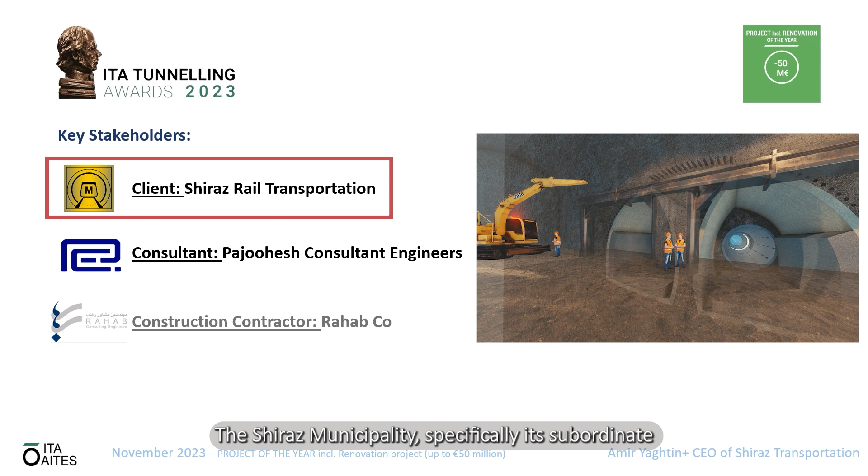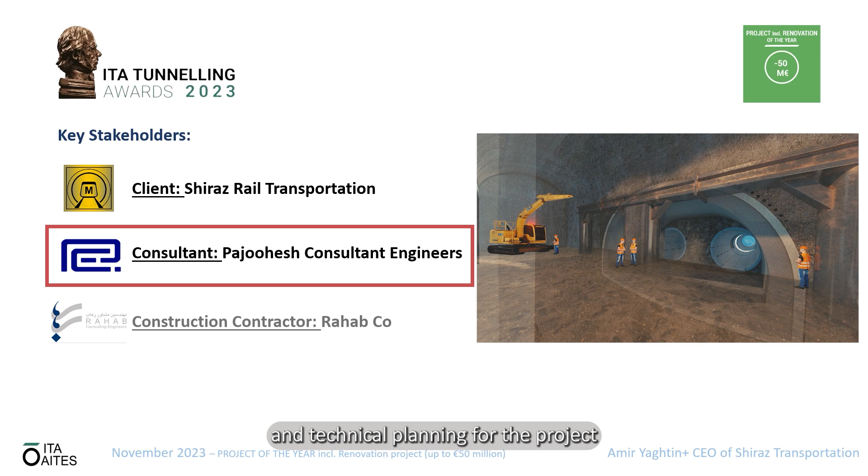In this section, we'll introduce the key stakeholders of our project, each playing a crucial role in its success. Client: the Shiraz municipality, specifically its subordinate, the Shiraz Rail Transportation Organization, is responsible for funding and commissioning the project after construction. Consultant: Pajoohesh consultant engineers provide design oversight and technical planning for the project. Construction contractor: Rahab Company specializes in infrastructure projects, handling excavation and construction tasks.

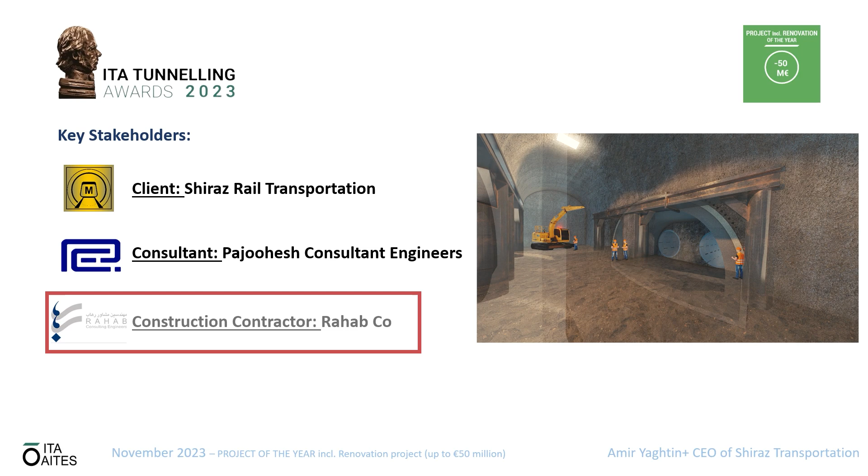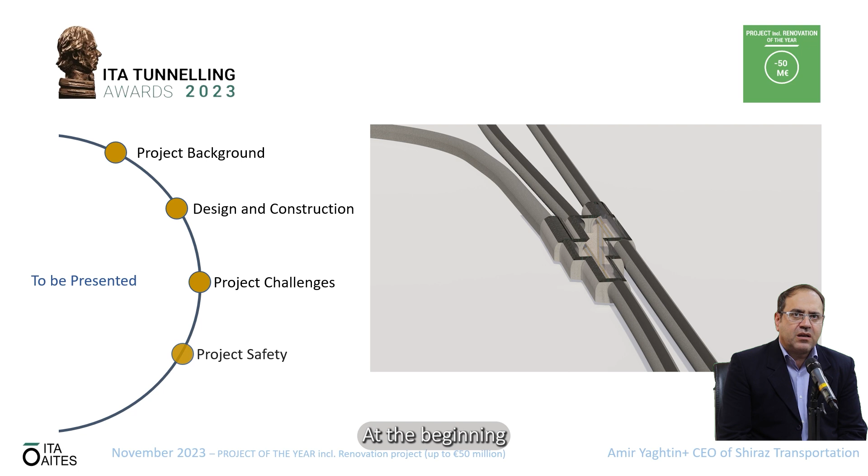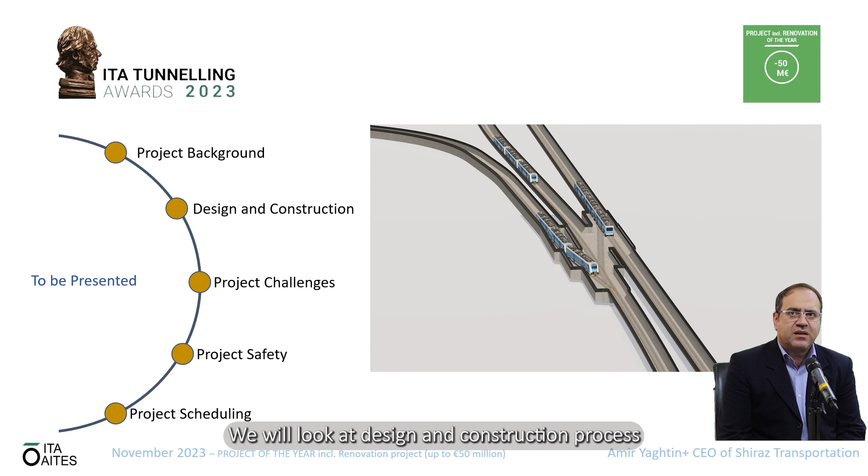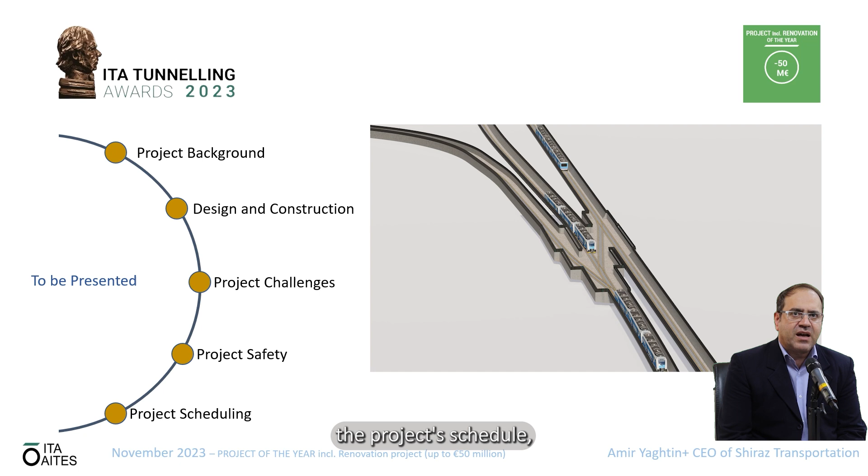In this presentation, we will talk about the following topics. At the beginning, we will take a look at the project's history and the reasons for its construction. Following that, we will look at the design and construction process as well as the challenges we encountered along the way. Finally, we will address the project's schedule, budget, and safety status.

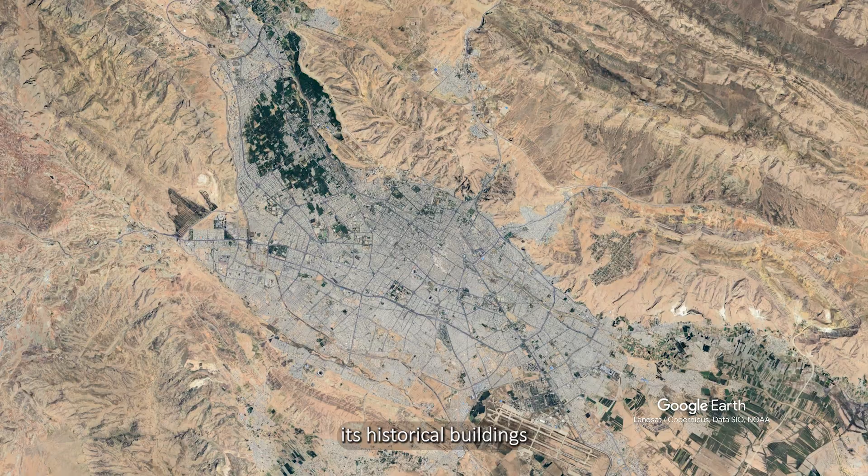Shiraz, the city where our project is located, is a place steeped in history and culture. It's in the southwest of Iran and is known for its historical buildings that reflect its ancient past. Shiraz is also famous for being the hometown of Iranian poets like Hafez and Sadi. Today, it's a lively city with a diverse and hospitable population of around 2 million, making it the fourth largest city in Iran.

To address the problem of traffic congestion in Shiraz and help improve the air quality, especially during the colder months of the year, the development of metro lines has been part of the city's plans for the past 10 years.

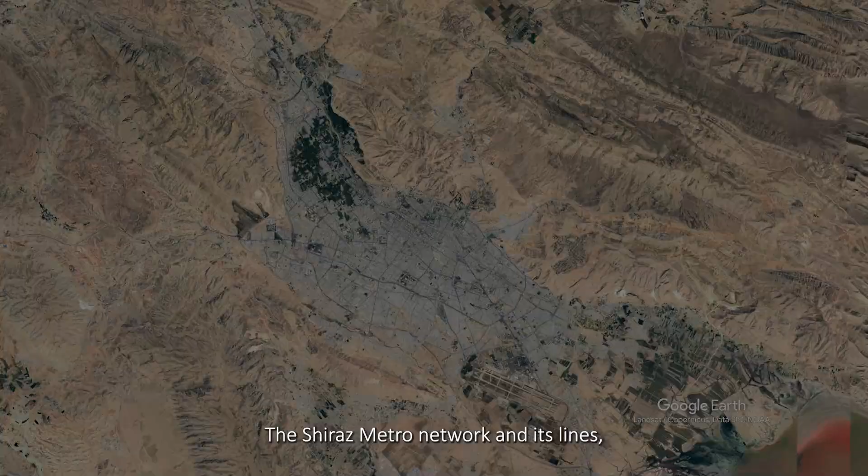The Shiraz metro network and its lines, after those in the capital city Tehran, are the second largest metro system in the country. Once completed, it's expected to support over 200 million trips annually.

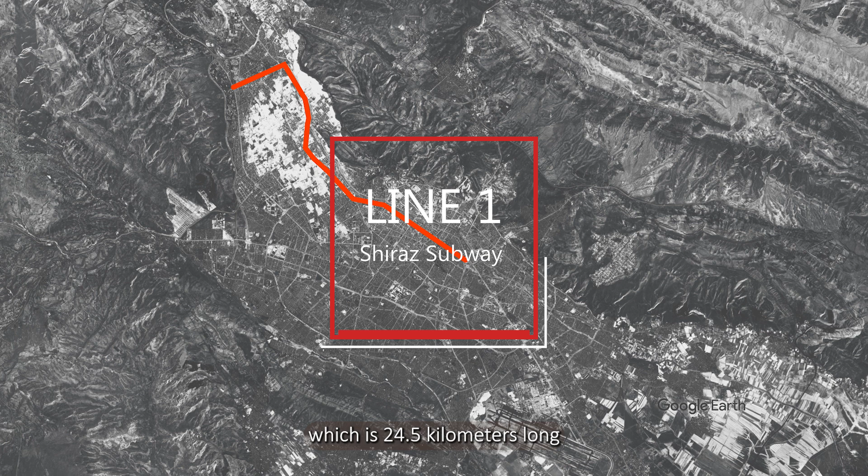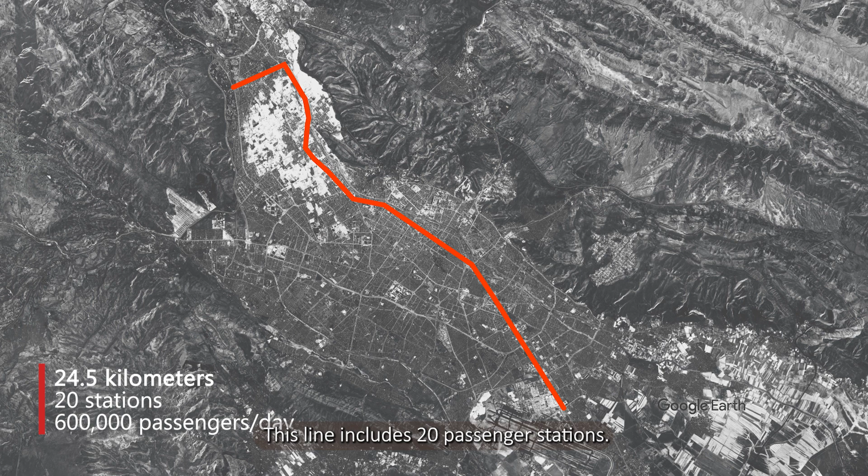The first line of the Shiraz Metro, which is 24.5 kilometers long, connects the eastern and western areas of the city, serving as a vital link within Shiraz. This line includes 20 passenger stations. During peak hours, Shiraz Metro's Line 1 transports 600,000 passengers daily.

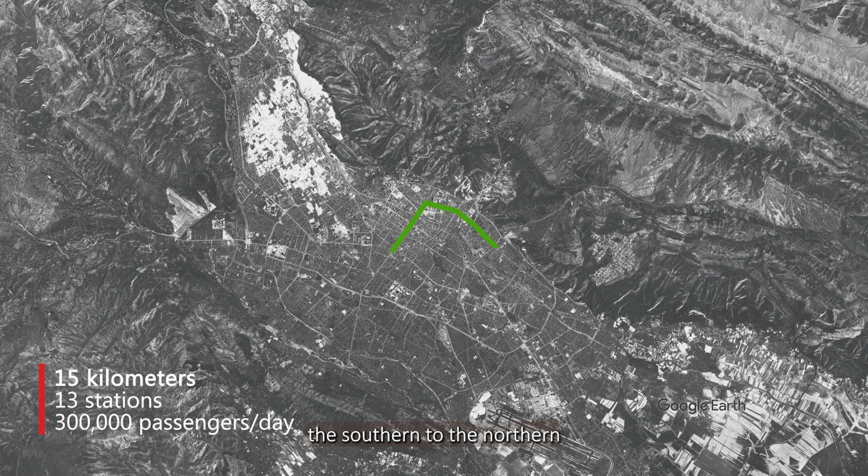The second line of the Shiraz Metro is approximately 15 kilometers long, with 13 passenger stations, extending from the southern to the northern parts of the city, providing service to important historical and cultural landmarks such as Hafez Tomb, Sadi Tomb, and Shiraz University of Medical Sciences. Line 2 also connects densely populated areas of the city to modern commercial hubs.

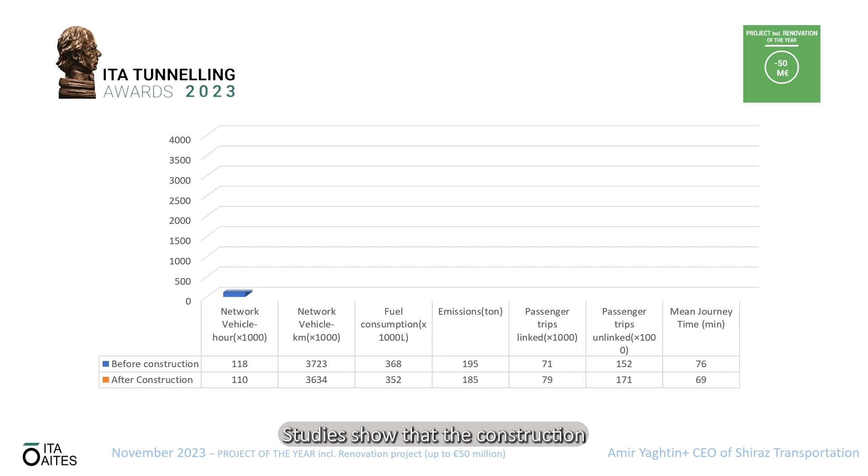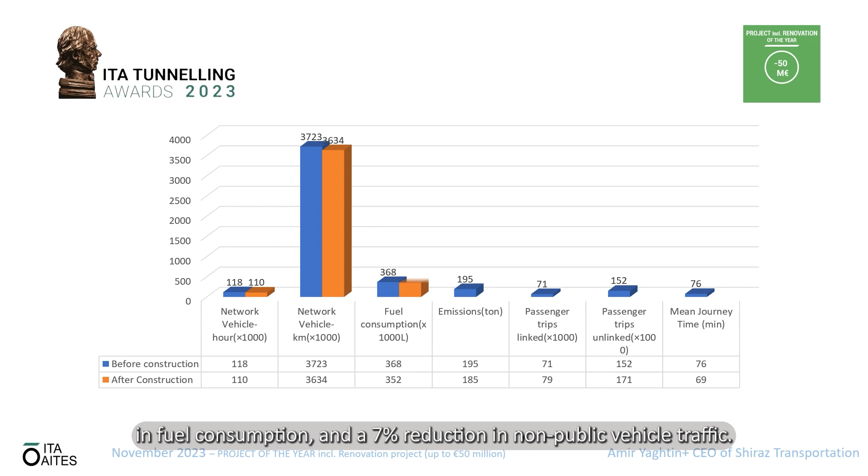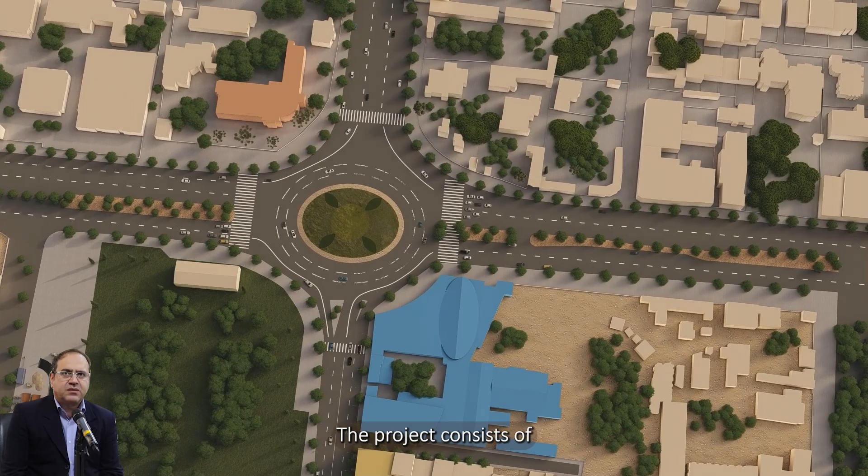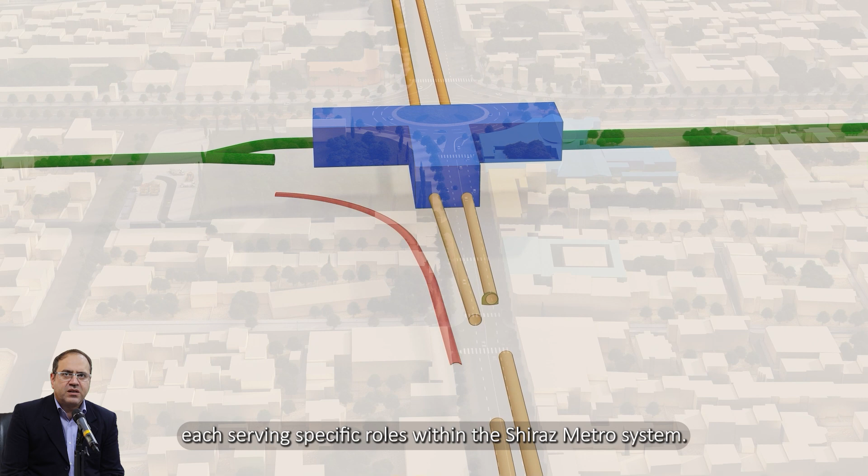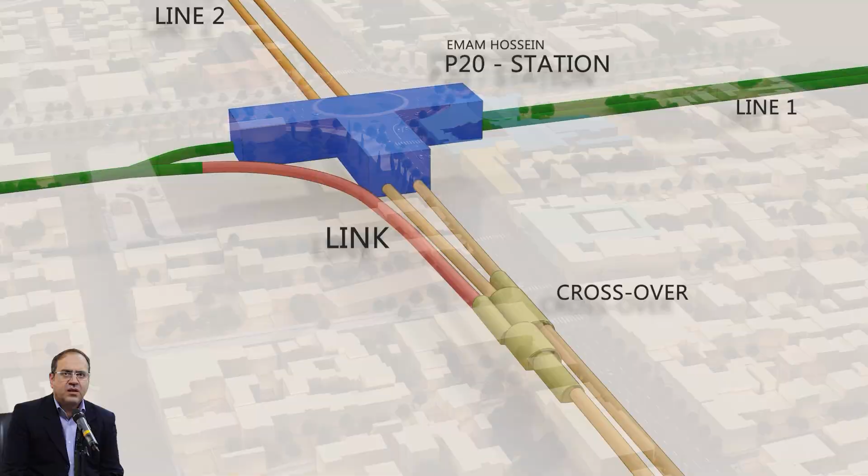The project consists of two important parts, the link tunnel and the crossover tunnel, each serving specific roles within the Shiraz metro system. The link tunnel is designed to make it easy for trains to move between Line 1 and Line 2. This tunnel is about 237 meters long, 8 meters wide, and 6 meters in height.

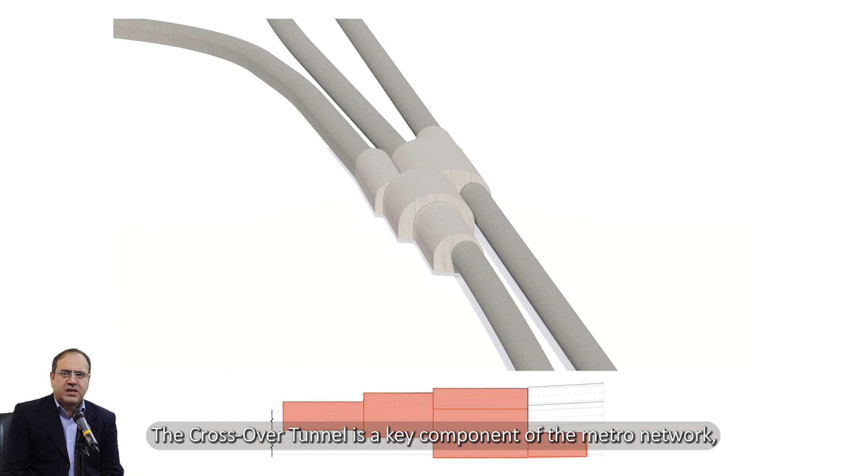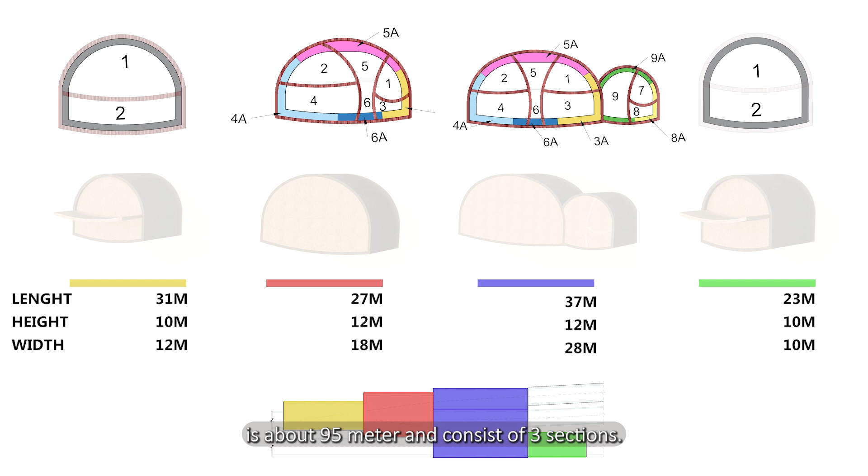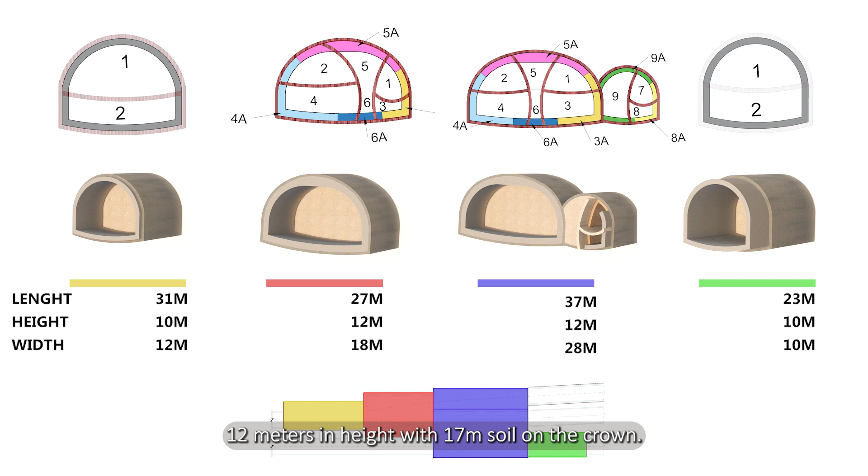The crossover tunnel is a key component of the metro network, allowing trains to switch tracks to go in the opposite direction on Line 2. The overall length of the crossover is about 95 meters and consists of 3 sections. The most critical is about 28 meters in width, 12 meters in height, with 17 meters of soil on the crown.

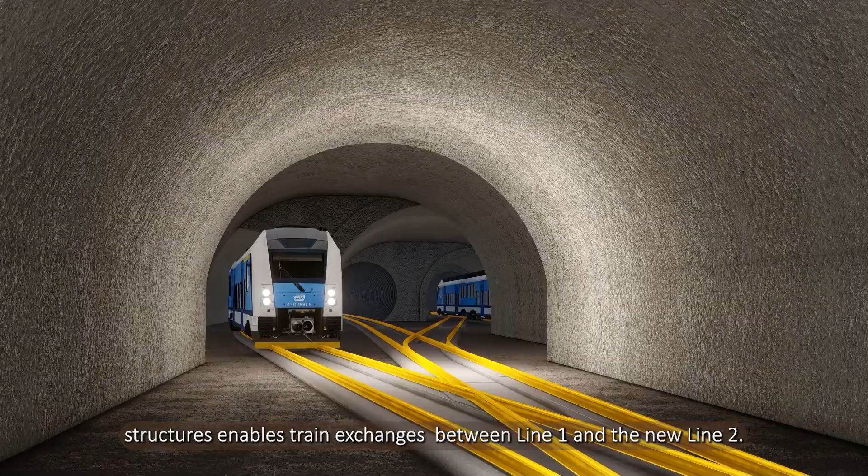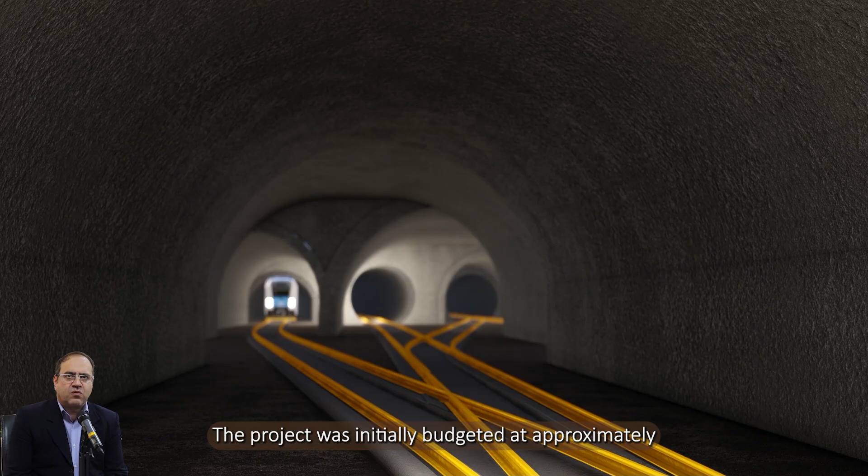Building these structures enables train exchanges between Line 1 and the new Line 2. They also support Line 2's urgent operation, given the incomplete train parking facilities. The project was initially budgeted at approximately 6.5 million euros and was estimated to be completed in 24 months.

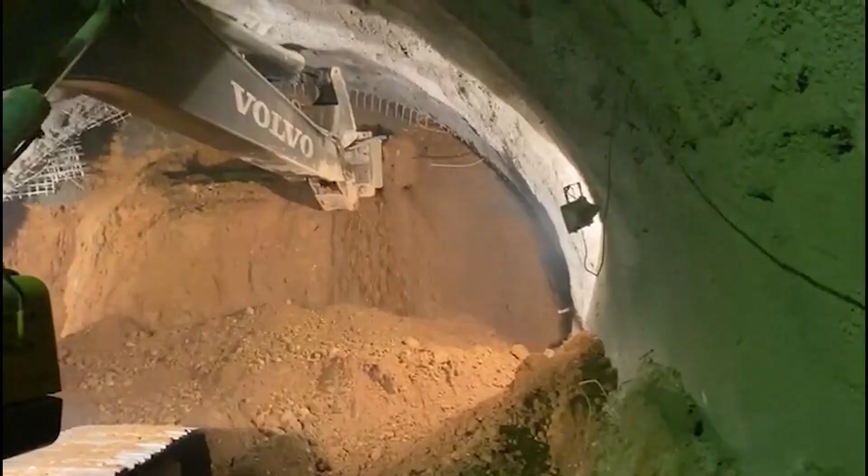The excavation volume carried out in the link tunnel was approximately 15,000 cubic meters, and in the crossover zone was about 18,000 cubic meters.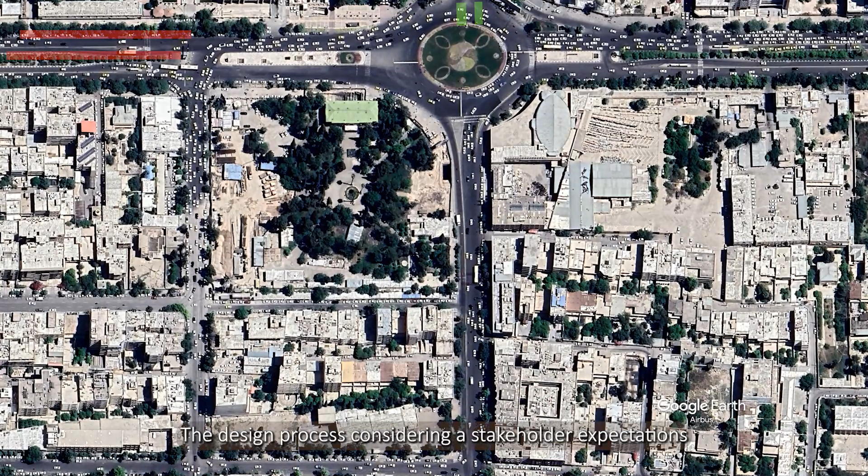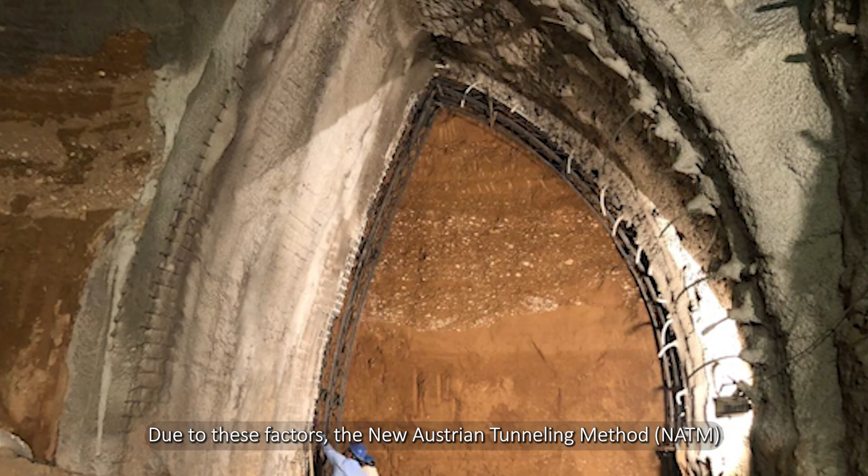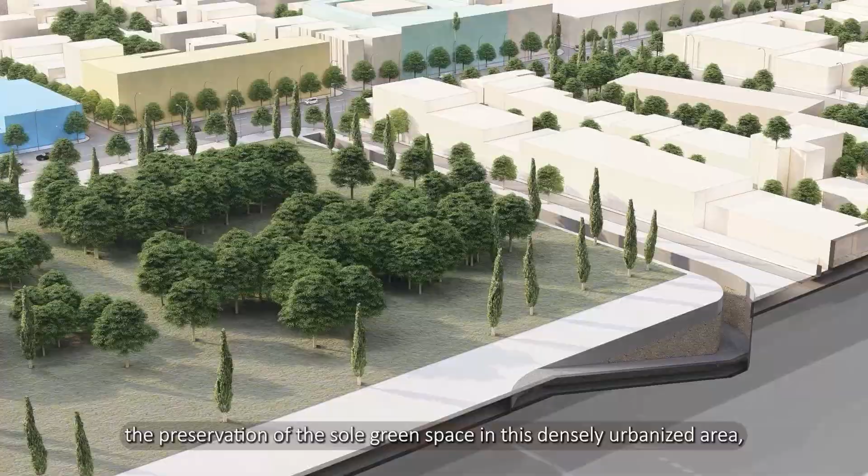The design process, considering stakeholder expectations and numerical modeling, took into account the ground traffic, the population, and building density in the project area. Due to these factors, the New Austrian Tunneling Method, NATM, was selected as the underground excavation method for this project. This method also enabled the preservation of the sole green space in this densely urbanized area, covering an area of 20,000 square meters.

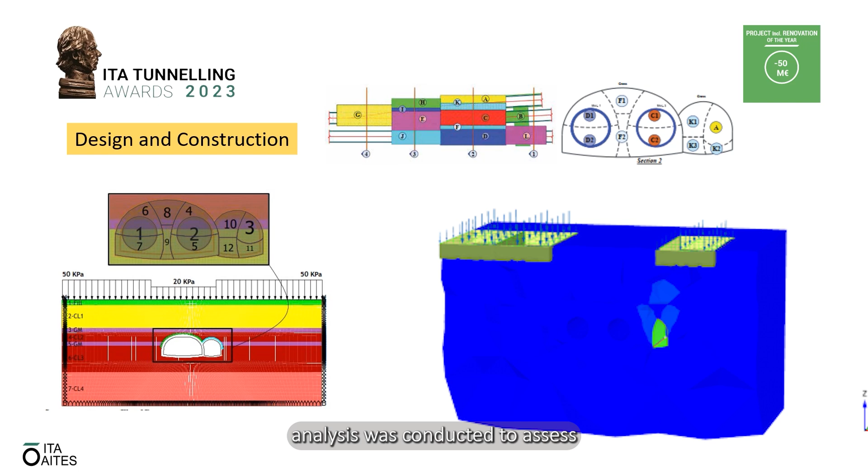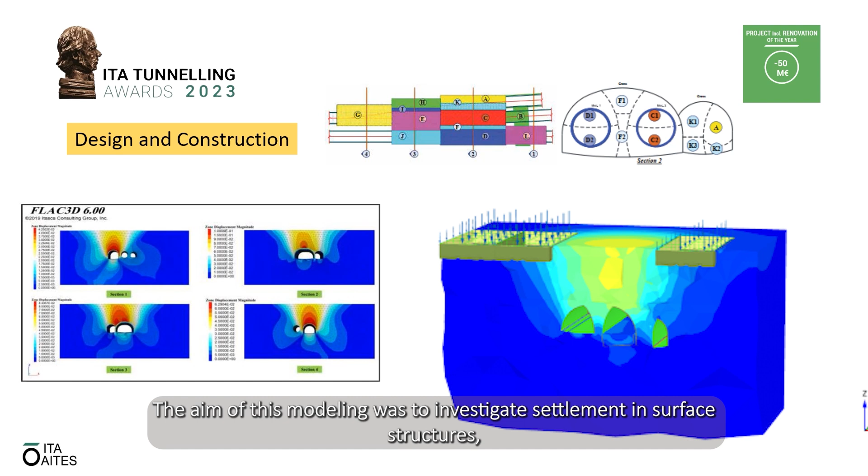2- and 3-dimensional analysis was conducted to assess the stability and design of both temporary and final structures. The aim of this modeling was to investigate settlement in surface structures, overall stability of excavation sections, and to explore possible measures for reducing settlement in subsequent stages.

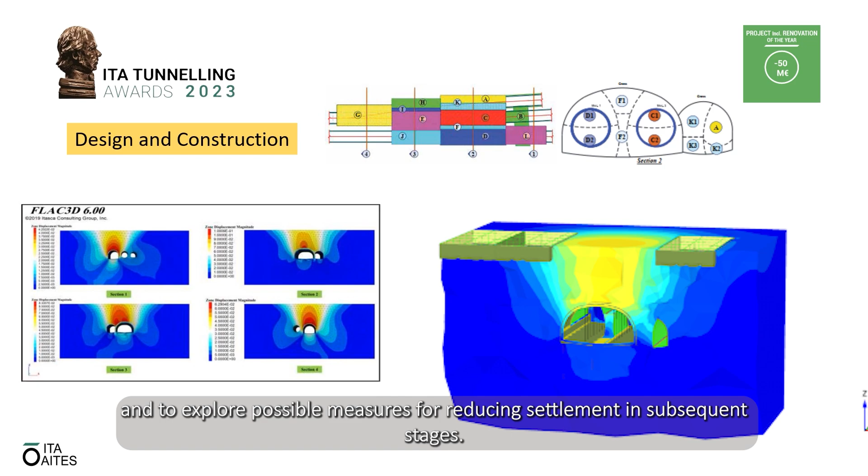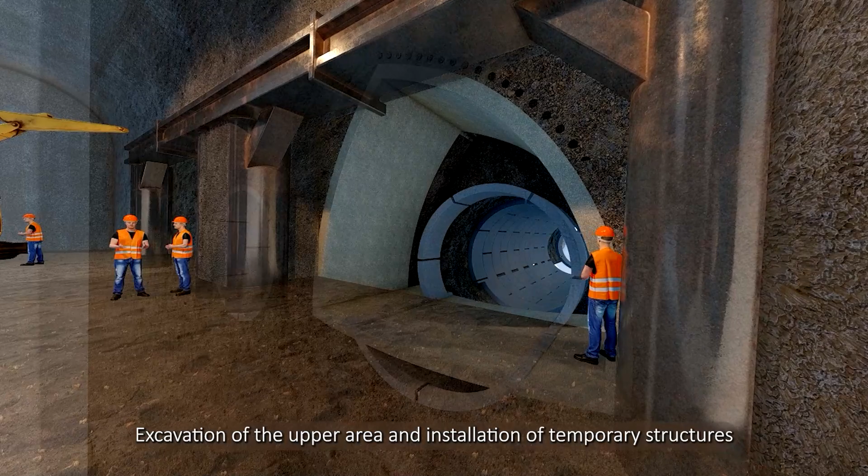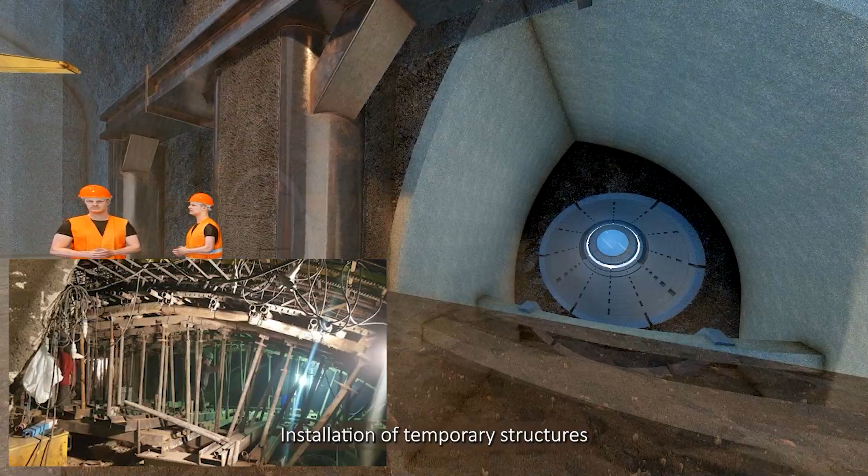In general, the following steps were carried out for the excavation and construction of the crossover: installation of forepoling for initial reinforcement at the crown of the section; excavation of the upper area and installation of temporary structures; removal of existing segmental tunnel sections; excavation of the lower area and installation of temporary structures; execution of a portion of final lining, including approximately half of the foundation and wall; and completion of excavation for all sections, finalizing the main structure's ring.

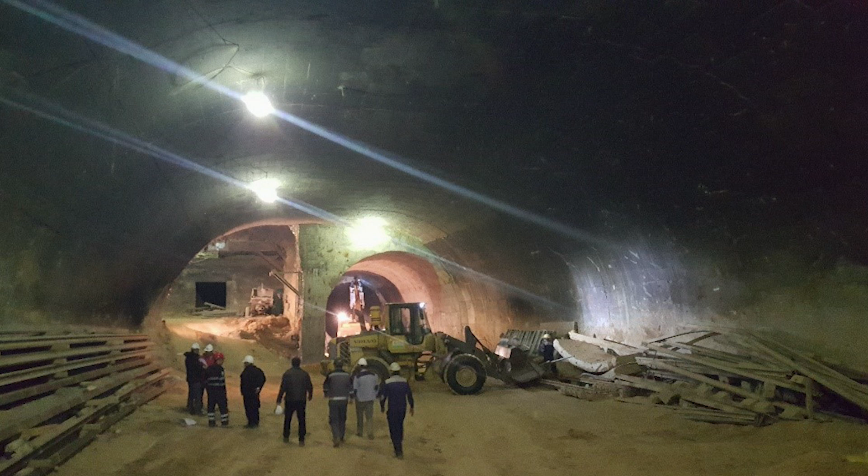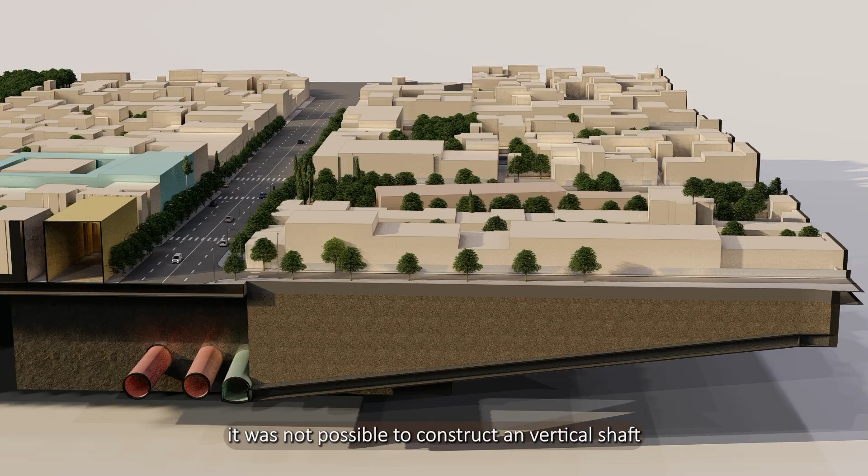The first challenge of the project was access to the starting point of the cross-structure excavation. Due to the presence of green spaces at ground level and existing military zones, it was not possible to construct a vertical shaft for commencing the excavation. The only available means of access to the initial section of the crossover tunnel was through the link tunnel. As a result, a cross-cut structure was employed to provide sufficient space to commence the excavation of the crossover.

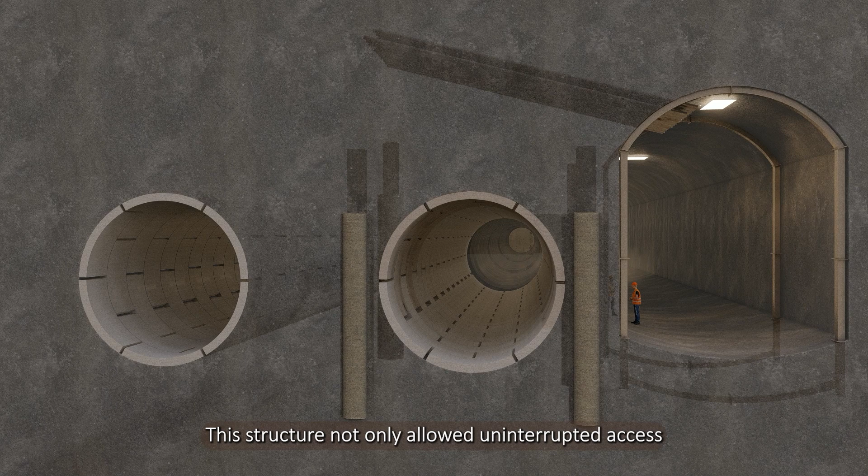To achieve this, we required a 3-way structure. This structure not only allowed uninterrupted access for the excavation of the crossover structure, but also facilitated the transfer of loads from the temporary structure over the segmental tunnel sections onto the ground.

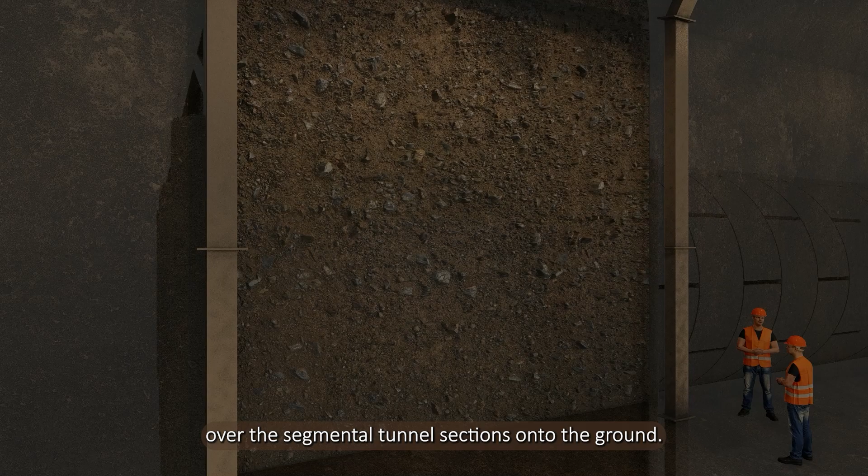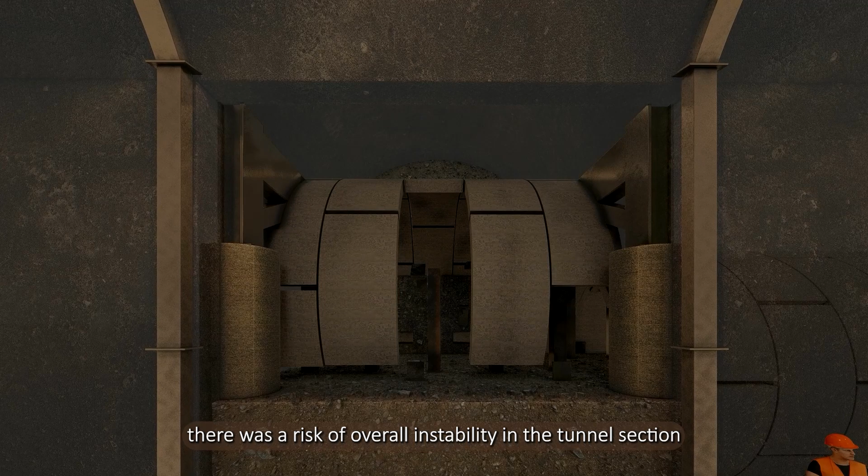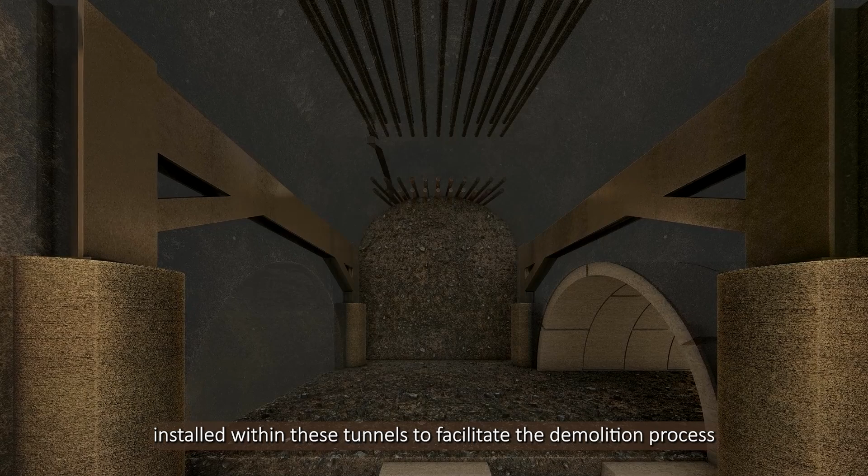The existing segmental tunnels also needed to be demolished to gain access to the starting section of the excavation. Since the demolition of the segmental tunnel took place from the outside, there was a risk of overall instability in the tunnel section. To mitigate this risk, temporary support columns were installed within these tunnels to facilitate the demolition process. Adjacent segments were also securely connected from the inside using metal plates.

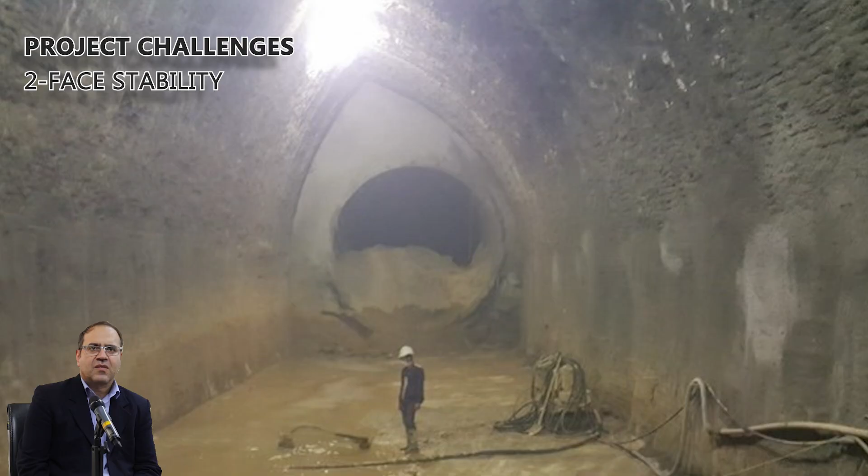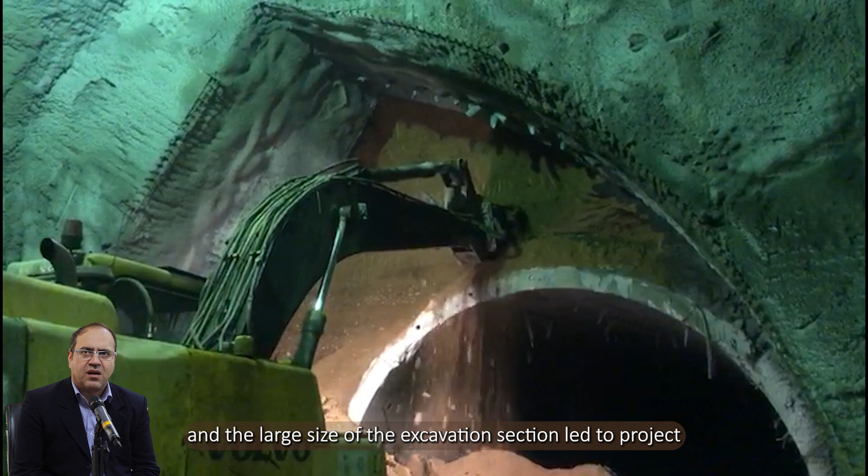The presence of underground water at the base of the tunnel walls, loose soil within the tunnel's cross section, and the large size of the excavation section led to project delays and posed safety risks to the excavation process.

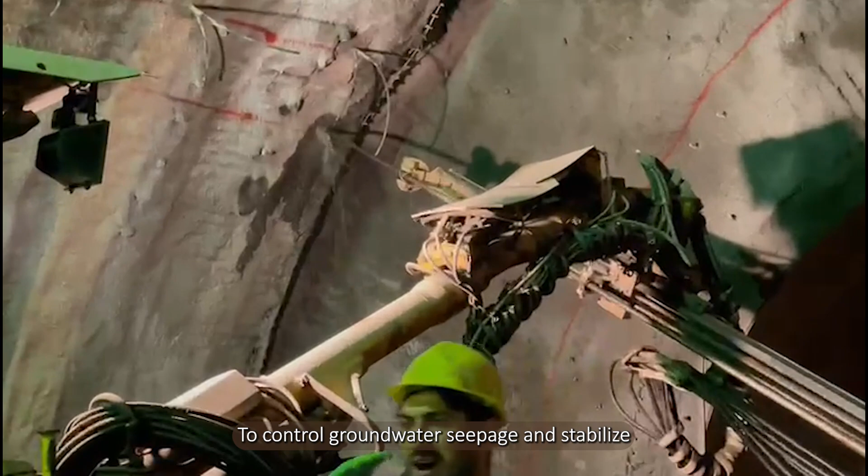To control groundwater seepage and stabilize the surrounding soil, injection was employed. The forepoling system was also used to enhance stability in the crown and sidewalls of the sections.

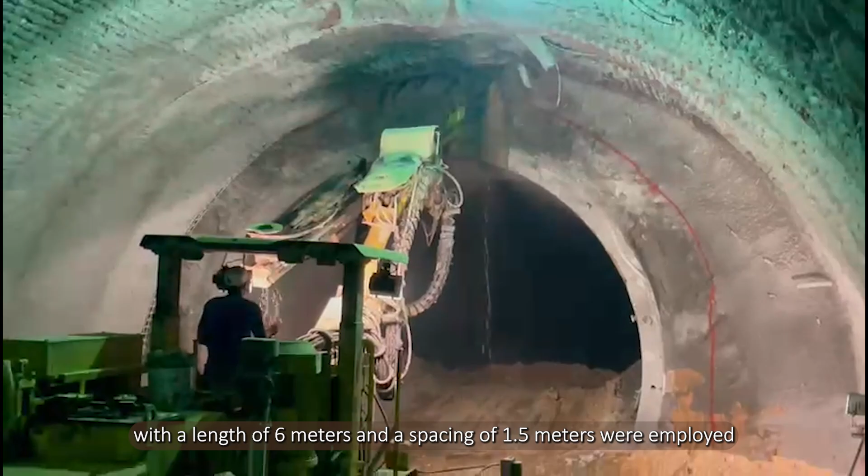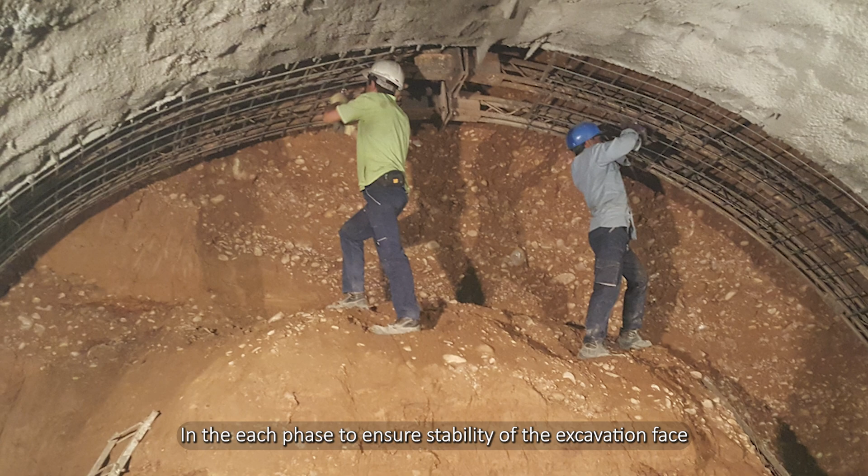Based on previous computer analysis, forepoling systems with a length of 6 meters and a spacing of 1.5 meters were employed. Furthermore, based on lessons learned from past projects, an unexcavated wedge-shaped area was left in each phase to ensure stability of the excavation face. Before commencing the excavation, a comprehensive assessment of the surface level structures, generally around 70 years old with vulnerable steel frameworks, was conducted.

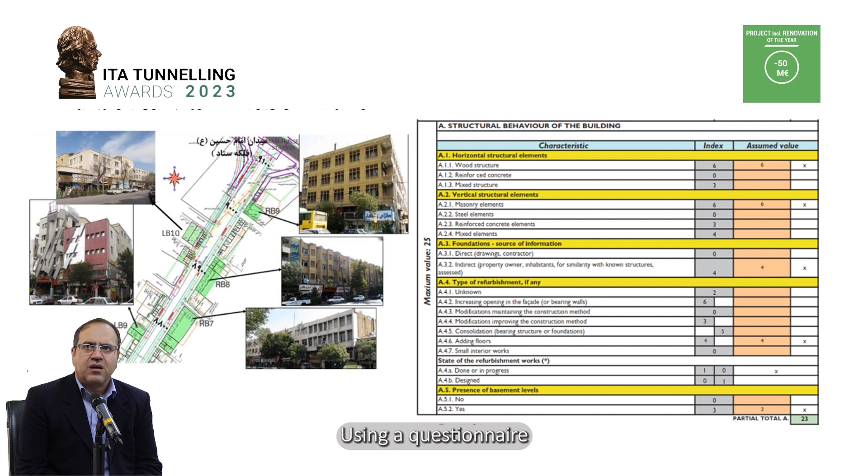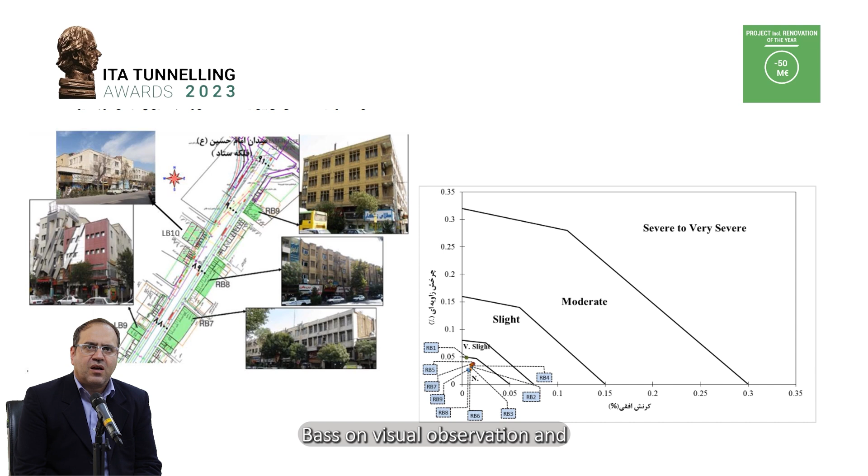The condition of these structures was evaluated using a questionnaire known as BCS forms. They consider their overall health based on visual observation and existing technical documentation.

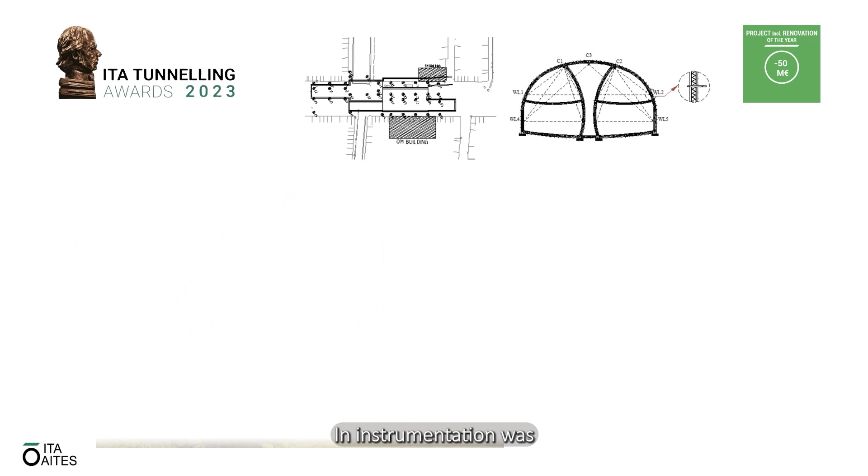Based on BCS forms ranking, additional instrumentation was installed on some of these structures. These instruments were monitored, and the status of these structures was observed on a daily basis.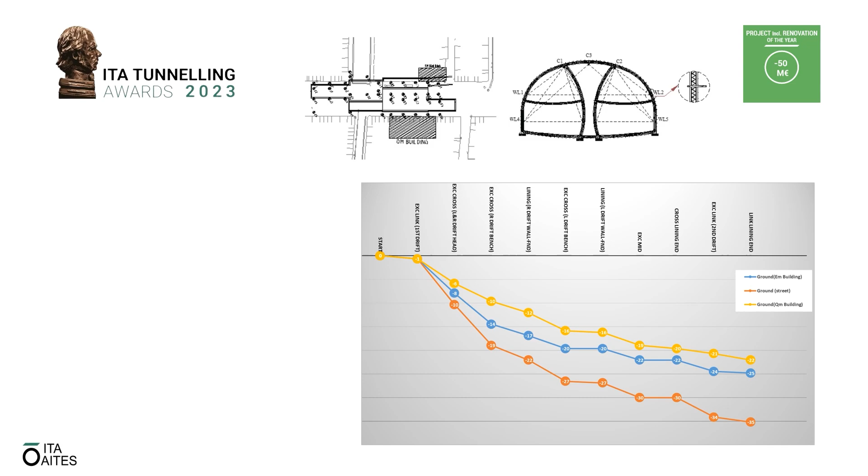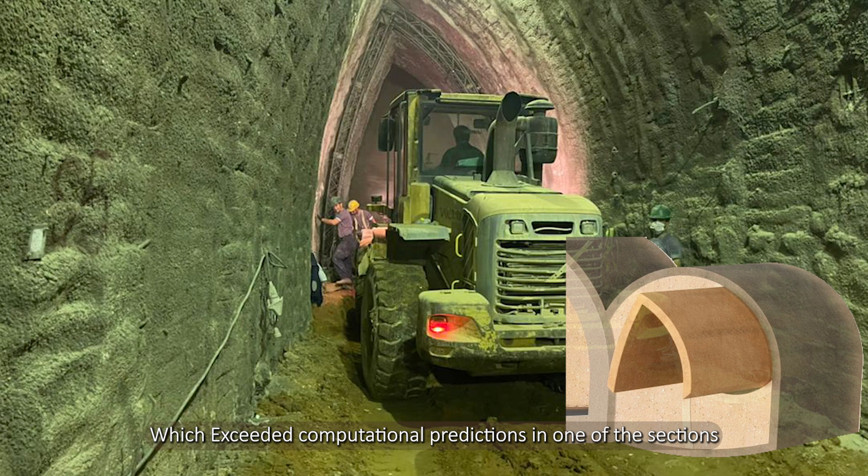Another challenge was the ground settlement, which exceeded the computational predictions in one of the sections. Based on a pre-designed scenario in the project's risk analysis, double-layer initial support had been used to control this settlement.

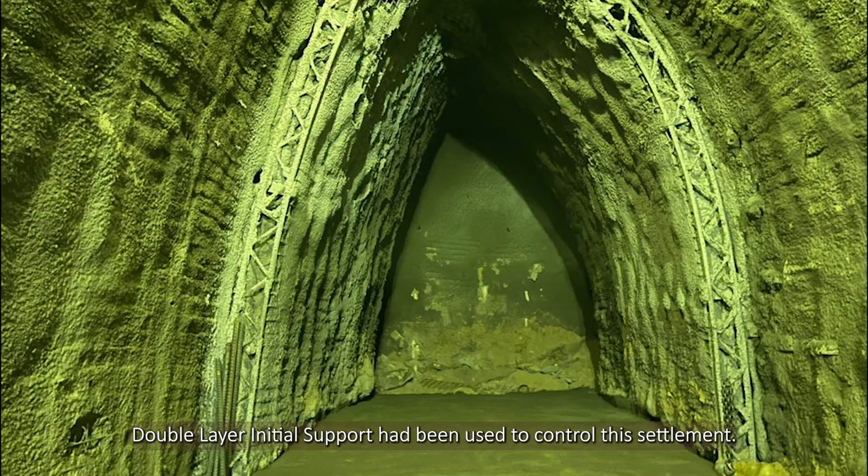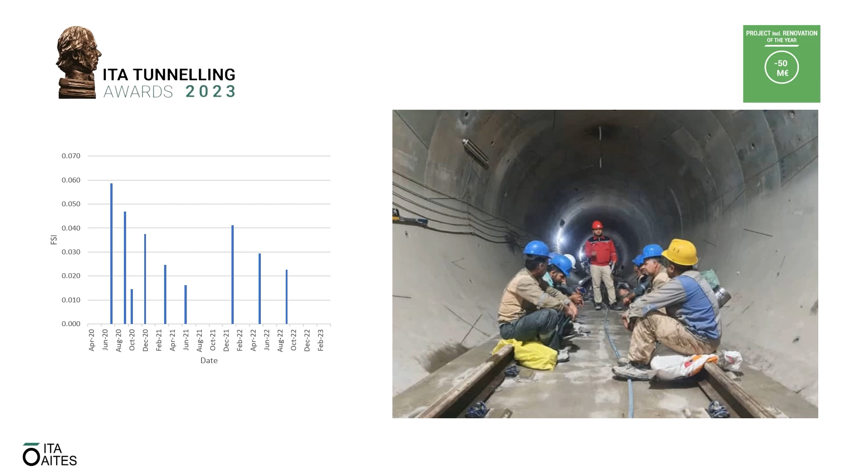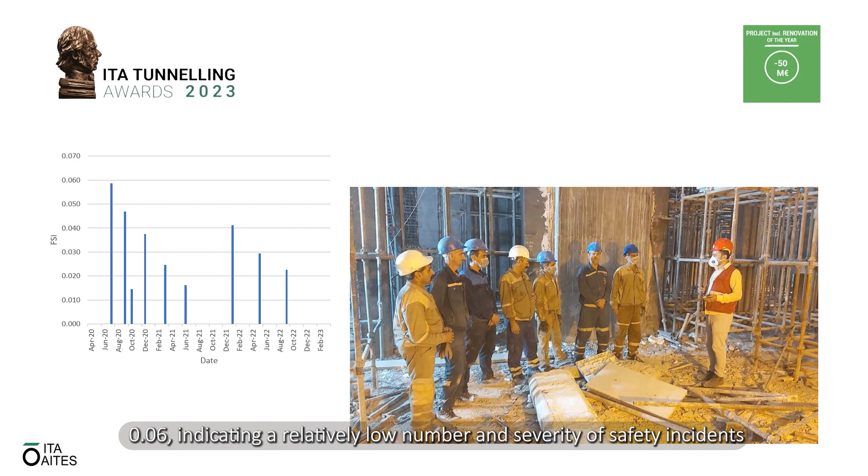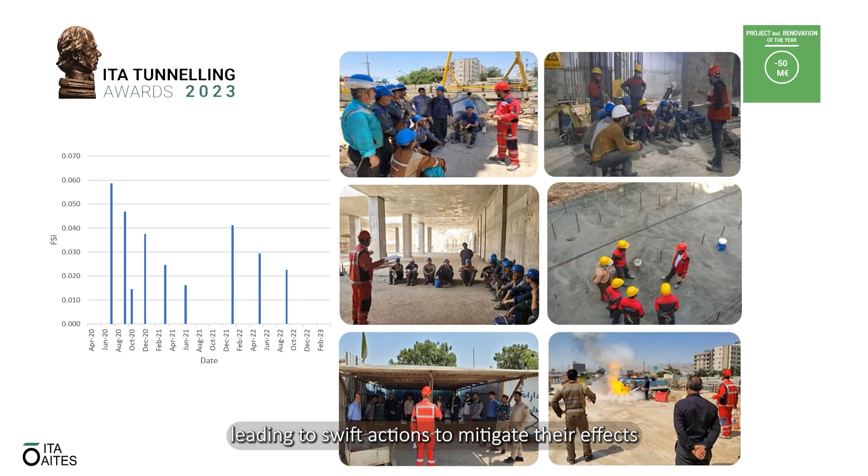Safety in the project is assessed using the Frequency Severity Index (FSI). The maximum recorded FSI in this project was 0.06, indicating a relatively low number and severity of safety incidents. Continuous monitoring and analysis of safety data during the construction process helped identify potential hazards, leading to swift actions to mitigate their effects.

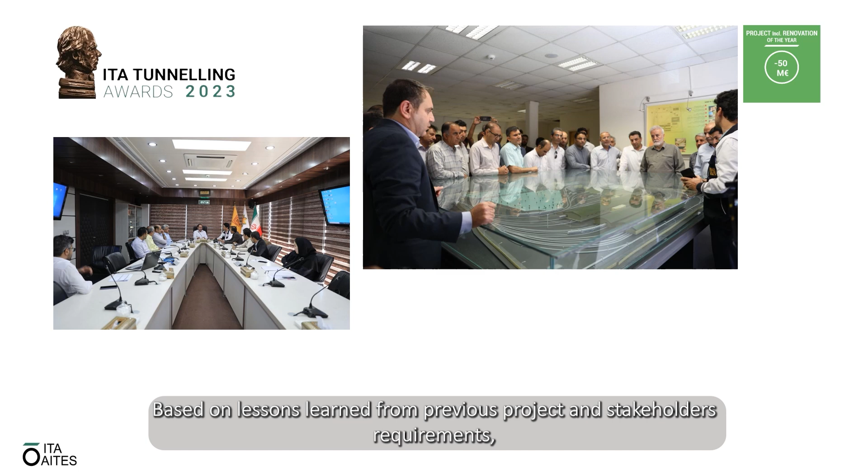A key focus of this project was the proactive control of schedule deviations. Based on lessons learned from previous projects and stakeholders' requirements, WBS and critical path of the project was determined. Detailed reports were regularly generated on a daily, weekly, and monthly basis to monitor progress.

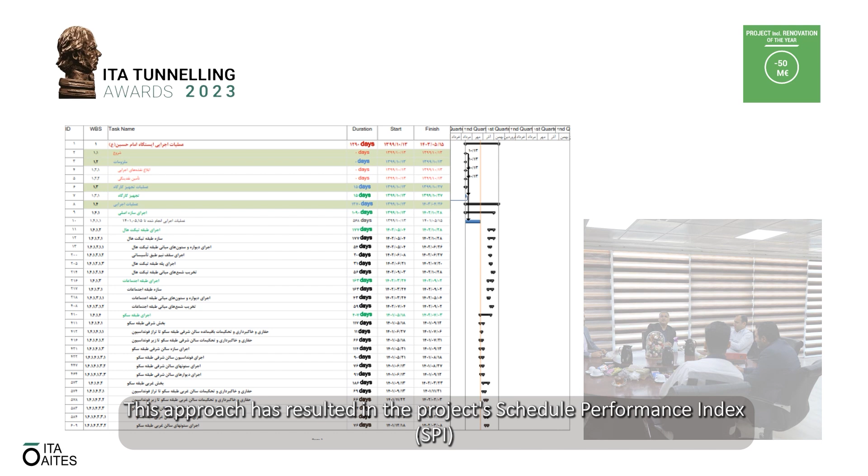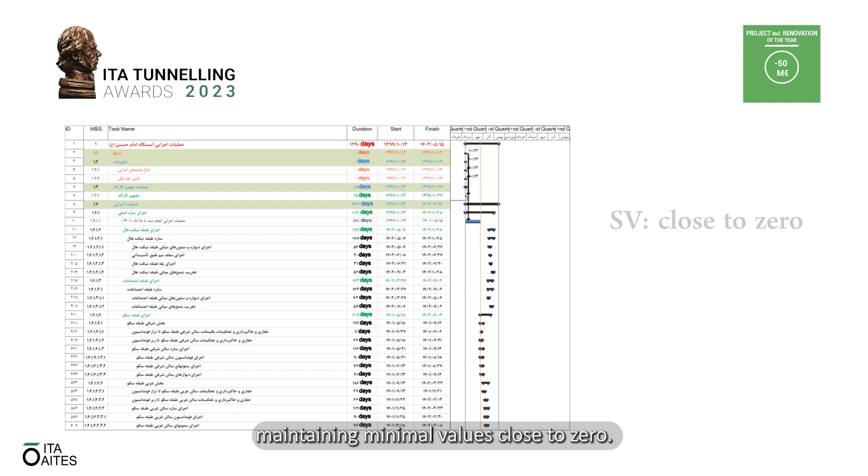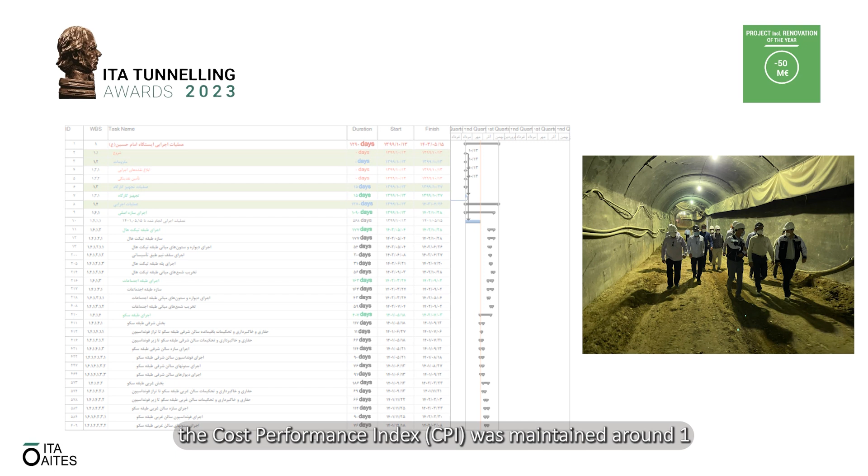The initial estimated budget for the project was 6.5 million euros, and effective cost control measures ensured that the Cost Performance Index, CPI, was maintained around 1.

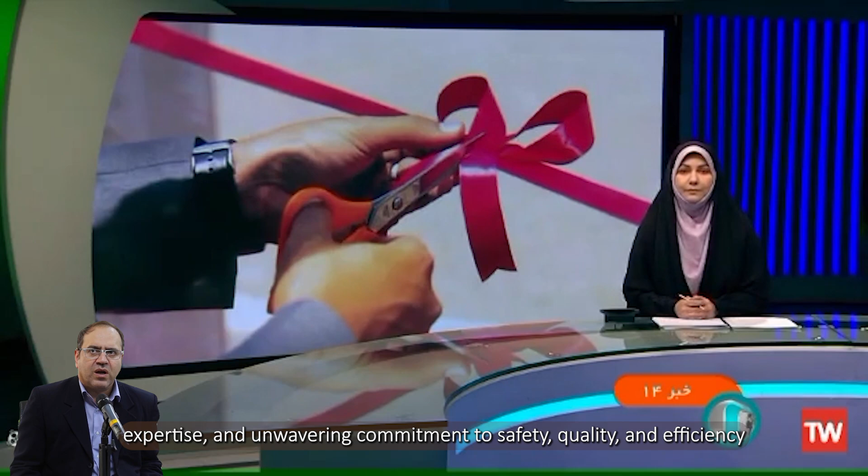In conclusion, this project marked a significant milestone in our area. It showcases our team's dedication, expertise, and unwavering commitment to safety, quality, and efficiency, signifying a remarkable advancement in local and national engineering experience.

We look forward to a brighter future with improved transportation and opportunities for all. Thank you for your attention.